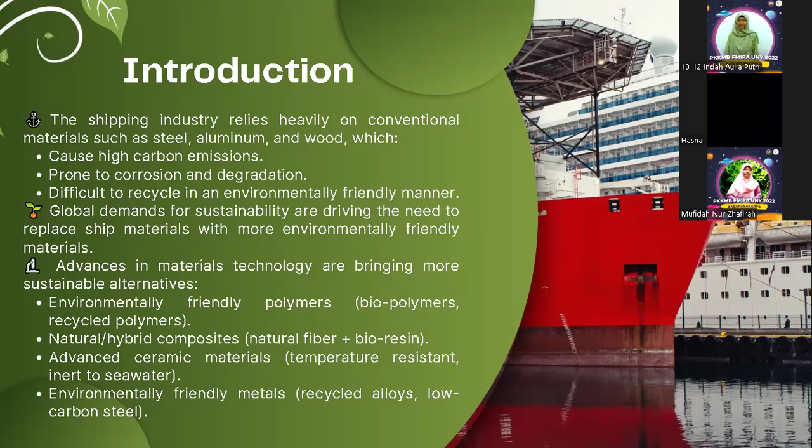Although conventional materials are still dominant in ship construction, they still have some weaknesses in their long-term sustainability, so it is necessary to develop alternative materials such as: one, sustainable composite materials for ship application; two, sustainable polymer materials for ship application; three, sustainable metal materials for ship application; and the last, sustainable ceramic materials for ship application.

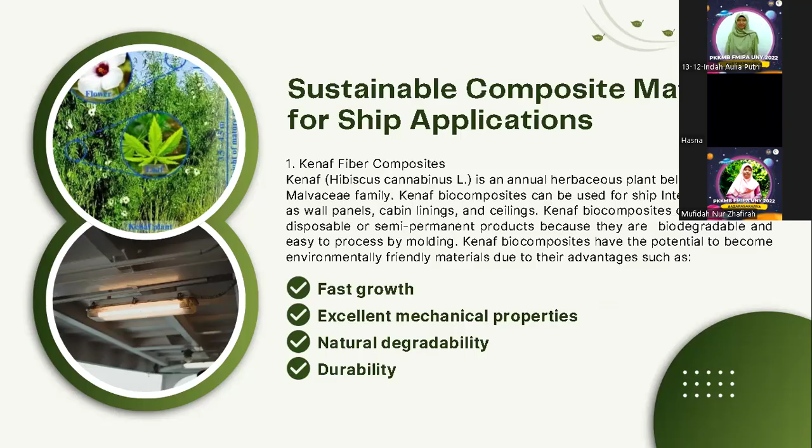The first one is sustainable composite materials for ship applications. The first one is kenaf fiber composites. Kenaf, or Hibiscus cannabinus L, is an annual herbaceous plant belonging to the Malvaceae family. Kenaf biocomposites can be used for ship interior parts such as wall panels, cabin linings, and ceilings. Kenaf biocomposites can be used for disposable or semi-permanent products because they are biodegradable and easy to process by molding.

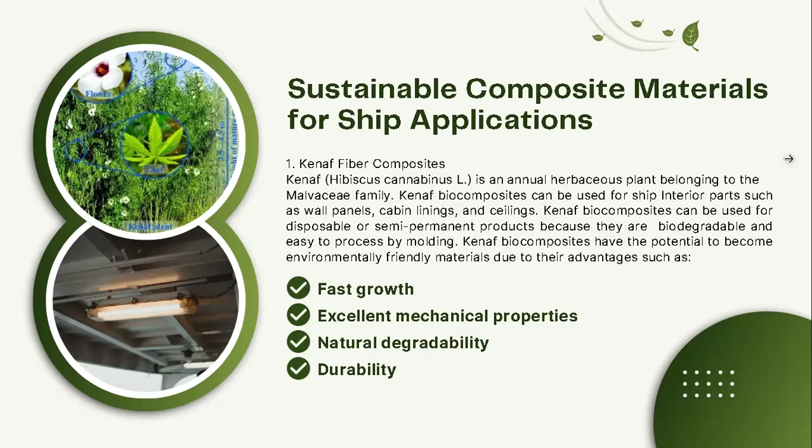Kenaf biocomposites have the potential to become environmentally friendly materials due to their advantages, such as fast growth, excellent mechanical properties, natural degradability, and durability. The next, the second one, is flax and hemp fiber composite with epoxy or bioresin.

Epoxy resin-based biocomposite with flax and hemp fibers has significant potential to be used as an environmentally friendly material in the maritime field. Tests of the two types of composites, flax/epoxy and hemp/epoxy, show that both materials have good mechanical resistance and show significant difference in marine environment resistance.

Flax fiber has superior mechanical performance, with higher tensile modulus and flexural strength, and better durability after seawater immersion than hemp fiber. Flax/epoxy has better structural resistance to biofouling after 6 months of immersion in seawater.

These biocomposite materials can replace conventional materials such as fiberglass used for small vessels, interiors, and hull panels, but have a lower carbon footprint in line with sustainable development principles. These biocomposites have advantages such as being lightweight, adequate thermomechanical properties, and potential for long-term sustainable use.

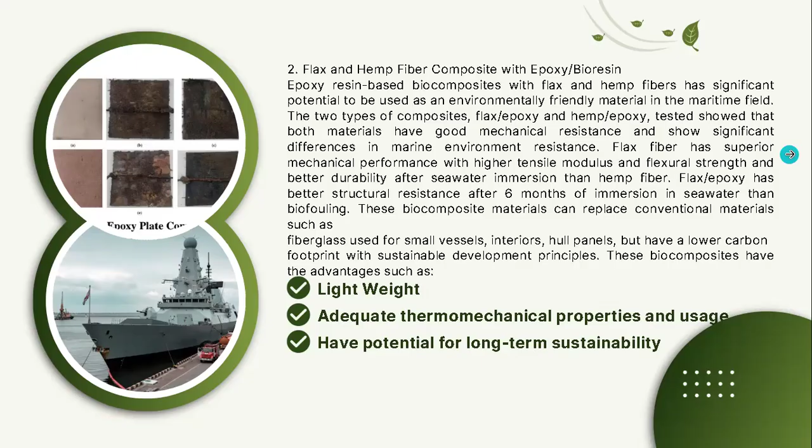Okay, and then sustainable polymer materials for ship application. The first, fuel and water tanks; then electrical system cable enclosures and sheathing; buoys and floating structures; ventilation and air duct systems; seals, gaskets, and elastomeric components; non-structural flooring and interior upholstery panels; and the last, pipes and channels, or piping systems.

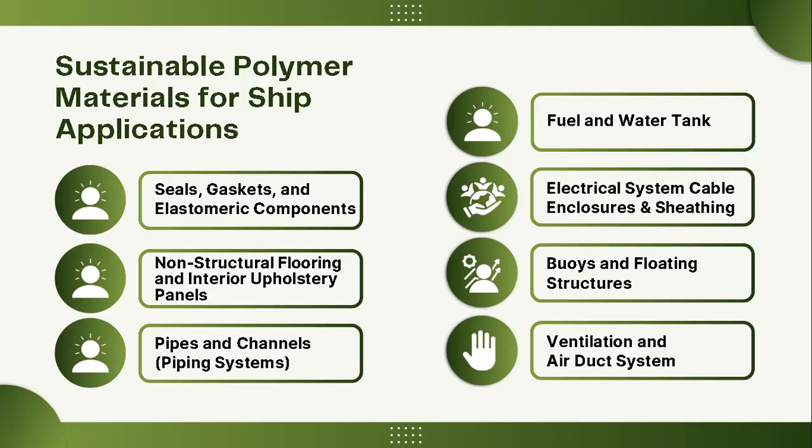Fuel and water tanks. Piping systems on ships, which are usually made of metal such as copper or stainless steel, can be replaced with thermoplastic polymers such as polyvinyl chloride or PVC, polypropylene or PP, or high-density polyethylene or HDPE.

Electrical system cable enclosures and sheathing. Cable protection ducts and electrical equipment casings can be made of polyethylene, polycarbonate, polyamide, or nylon. Besides being waterproof and electrically insulating, these materials are resistant to high temperatures and are non-flammable when formulated with flame-retardant additives. Some types are also biodegradable in bio-based versions, such as polylactide or PLA.

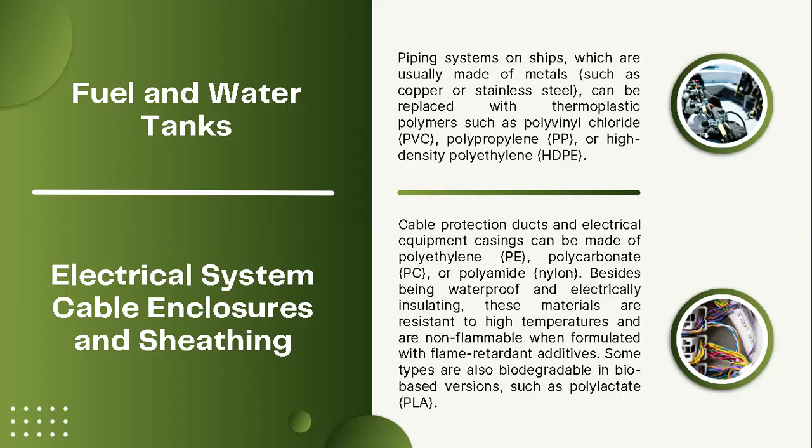Buoys and floating structures. Buoy devices and floating modular structures can use expanded polystyrene, foamed polyethylene, or even biofoam made from starch or lignin. These materials are lightweight, do not absorb water, and are recyclable or biodegradable depending on the type. EPS is very popular in buoys because of its low density and low cost.

Seals, gaskets, and elastomeric components. Seals and gaskets generally made from vulcanized rubber can now be replaced with thermoplastic rubber, ethylene propylene diene monomer, or silicone rubber. Besides being marine weather resistant, these materials have high elasticity and are stable against UV, ozone, and chemicals. Some silicone-based seals can also be made from bio-based sources, expanding the eco-friendly options.

Ventilation and air duct systems. Ship air pipes and vents previously made from aluminum are now being replaced with acrylonitrile butadiene styrene or polycarbonate blends. These materials are heat resistant, not easily deformed, and lighter than metals. ABS is also widely used in small boats and air conditioning systems due to its economy and stability.

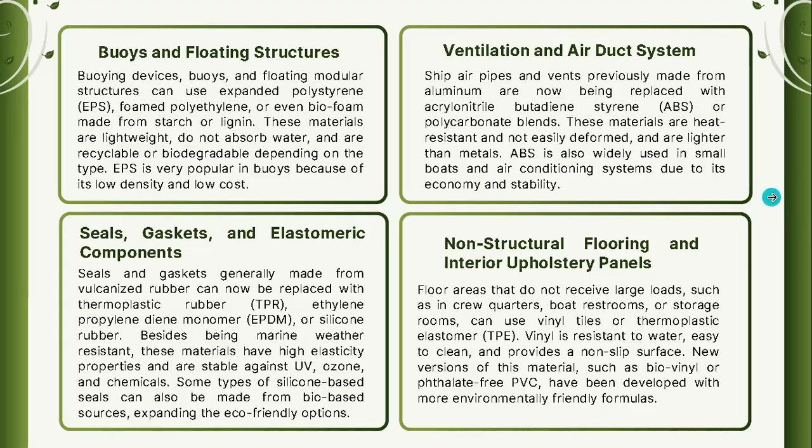And then piping systems. Piping systems on ships, which are usually made of metal such as copper or stainless steel, can be replaced with thermoplastic polymers such as polyvinyl chloride, polypropylene, or high-density polyethylene. These polymers are resistant to corrosion, lightweight, and easy to join using thermal or mechanical methods. HDPE in particular is known to be highly resistant to abrasion and chemical attack and is fully recyclable.

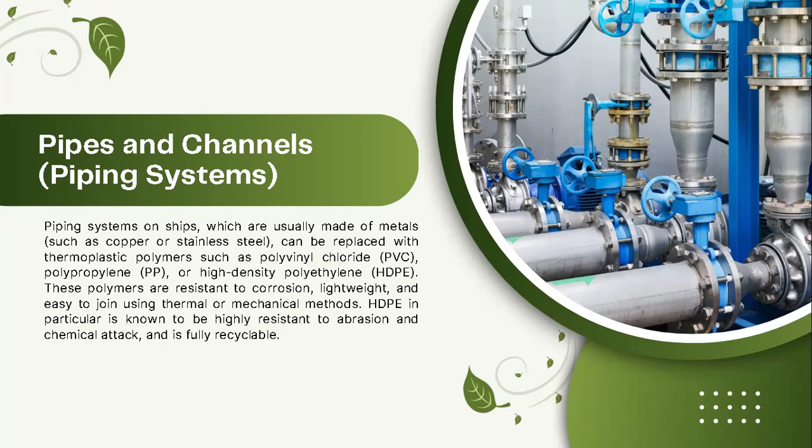Next is sustainable metal material for ship applications. The first one is aluminum alloys. Aluminum alloys have become a cornerstone in sustainable shipbuilding due to their remarkable weight to strength ratio and corrosion resistance. They are lightweight, corrosion resistant, and highly recyclable. They improve fuel efficiency and reduce emissions, and are used in hulls and superstructures.

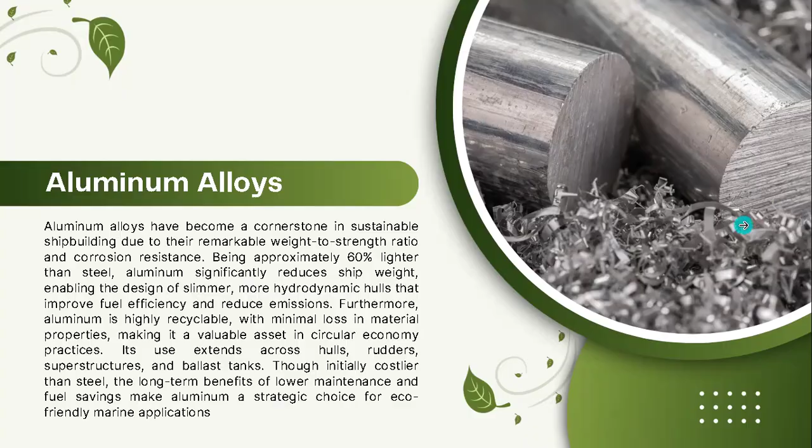The second one is titanium alloy. Titanium alloys are among the most corrosion resistant and mechanically durable materials used in modern ship construction, particularly for parts exposed to harsh marine environments, such as propellers and submerged components. Their exceptional resistance to seawater corrosion and fatigue ensures an extended service life and minimizes maintenance.

Moreover, titanium is compatible with hydrogen applications, making it suitable for advanced cryogenic storage tanks in hydrogen-powered vessels. Although expensive, titanium's long-term sustainability lies in its recyclability and the reduced need for replacement or repairs.

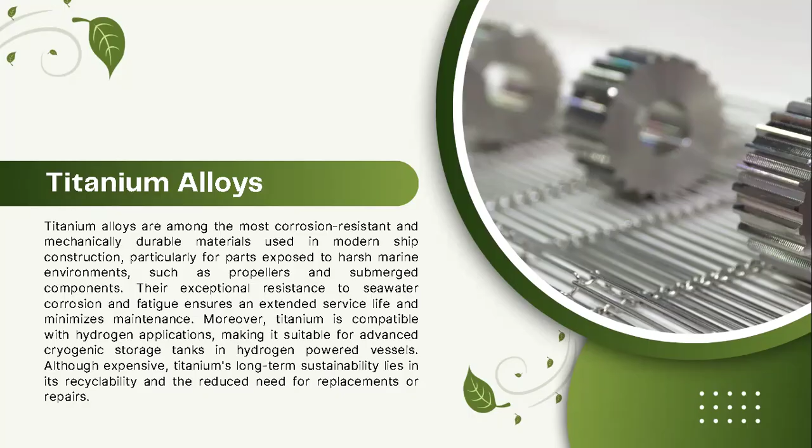The third one is mild and medium carbon steel. Mild steel or low carbon steel remains the most commonly used metal in shipbuilding globally due to its low cost, availability, and decent mechanical performance. It forms the structural backbone of most ship hulls, decks, and internal framing.

However, its high corrosion rate and environmental impact from mining and smelting processes present challenges. To address this, the use of protective coatings, surface treatments, and recycled steel is increasingly promoted to reduce environmental degradation. Sustainable strategies involving steel include local sourcing, reprocessing scrap steel, and integrating carbon capture during manufacture.

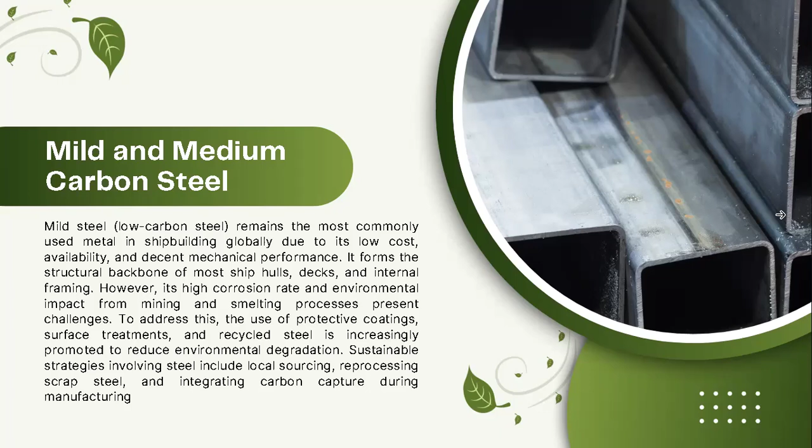The fourth one is nickel copper alloy. Nickel copper alloys such as Monel are preferred for applications involving continuous exposure to seawater, such as seawater intake systems, heat exchangers, and hull fittings. This alloy exhibits excellent corrosion resistance, especially to salt water, and requires minimal maintenance throughout the vessel's life cycle. Their durability reduces the frequency of part replacement, supporting both operational sustainability and economic efficiency.

Although more expensive than standard metals, their longevity compensates for upfront costs in environmentally sensitive ship operations.

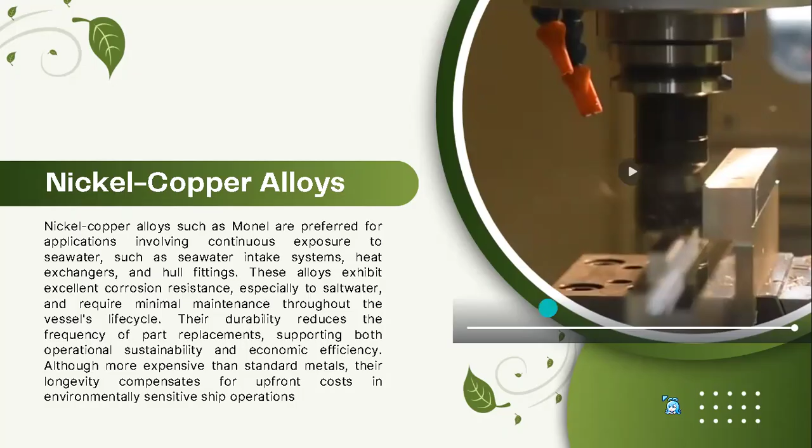And then there are copper-nickel alloys. Copper-nickel alloys are highly valued for their resistance to biofouling and microbial-induced corrosion, making them ideal for use in ballast water systems, desalination piping, and marine heat exchangers. This allows reduced use of biocidal coatings and chemicals, thus lowering the environmental footprint of ships. Their smooth surface discourages marine organism attachment, which also helps maintain ship efficiency by minimizing drag. This sustainable material aligns with international marine pollution prevention standards such as MARPOL Annex 5.

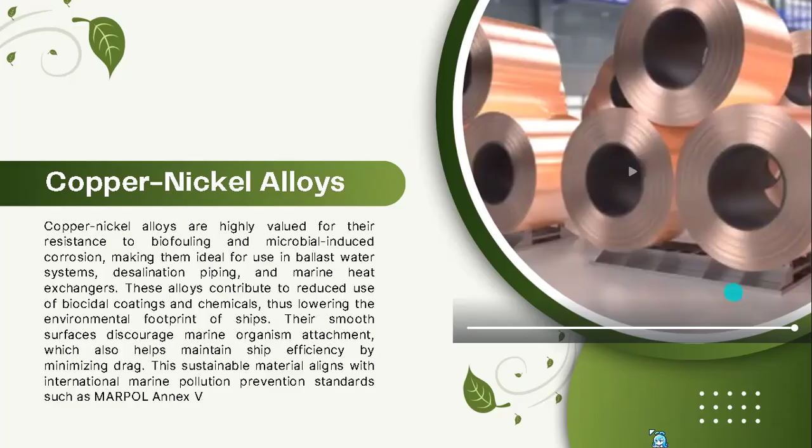The last one is aluminum foil and metallic spacers in insulation systems. In hydrogen-powered ships, advanced insulation is vital to contain cryogenic hydrogen at extreme low temperatures. Aluminum foil and metallic spacers are integral components in multi-layer vacuum insulation systems, or MLVI, which help reduce heat ingress and minimize hydrogen boil-off. The low thermal conductivity and formability of aluminum make it suitable for wrapping storage tanks and structural components that require precise insulation. This application, though passive, significantly impacts the energy efficiency and safety of zero-emission vessels.

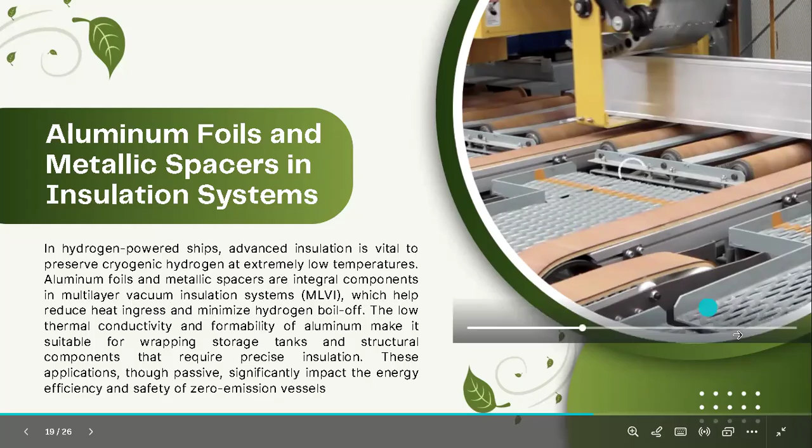And the last, sustainable ceramic material for ship application.

Now let's talk about the characteristics of ceramic. Ceramics are inorganic and non-metallic materials made by high heat processing of substances like clay, silica, and metal oxides. They have several important properties. First, they have a high melting point, are hard, and resistant to wear and chemicals. Second, ceramics have low thermal and electrical conductivity, which is good for insulation. Lastly, although brittle, their properties can be improved by grain refinement and composites.

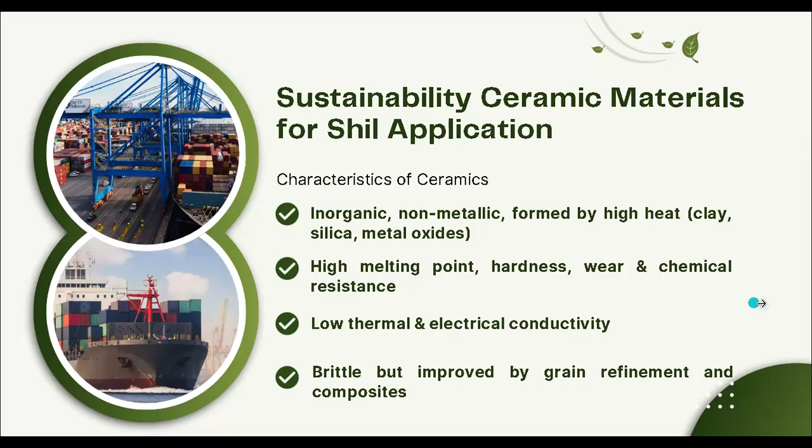Now, let's look at the advantages of ceramic in ship applications. Ceramics have excellent thermal and corrosion resistance, which is very useful in harsh marine environments. They are also durable, have a long service life, and are recyclable. Besides that, ceramics can be made from waste materials like fly ash and glass, which make them more sustainable.

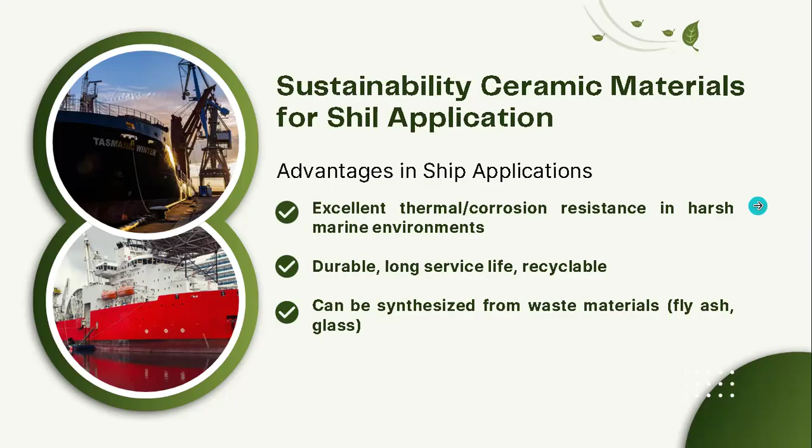Now let's continue with eco-friendly ceramic types, and the first one is alumina. Alumina is very hard, with a hardness of 9. It is also thermally stable and a good insulator. It is widely used in engine parts and electronic components on ships. Moreover, it's become more sustainable, as it is sintered using energy efficient methods.

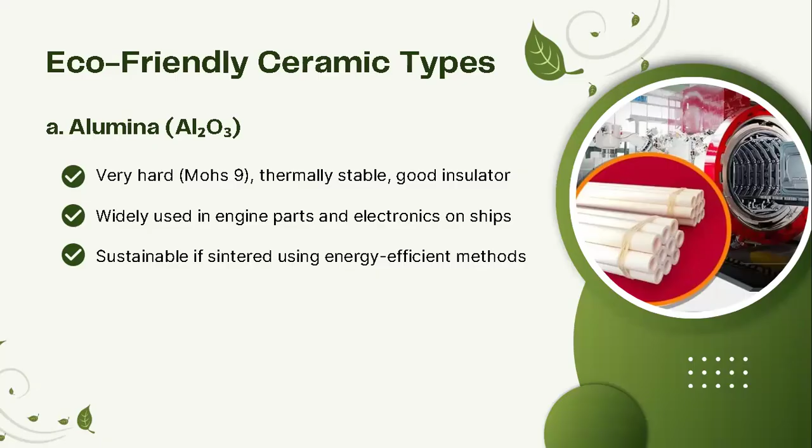Next, we have silicon carbide. It has high strength, thermal conductivity, and resistance to oxidation, which make it perfect for use in extreme conditions. This material is used in high temperature engines, heat exchangers, and scrubbers. In addition, it can be made from recycled silica and is known to be long lasting.